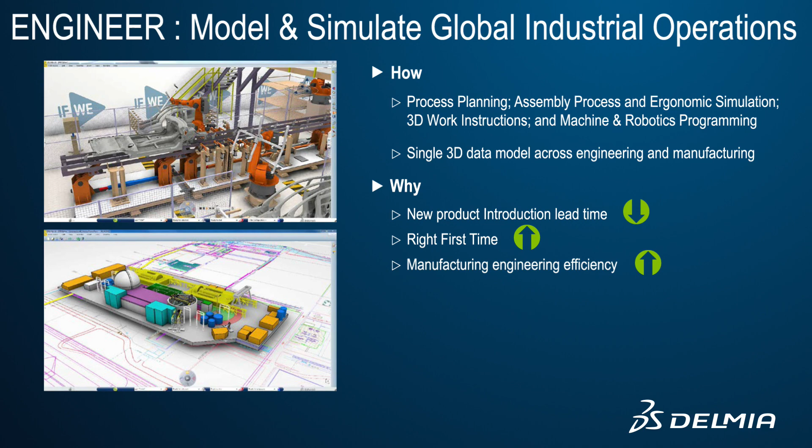This short video provides an overview of digital manufacturing capabilities enabling digital continuity. Digital continuity starts with virtual product design and continues through the production line.

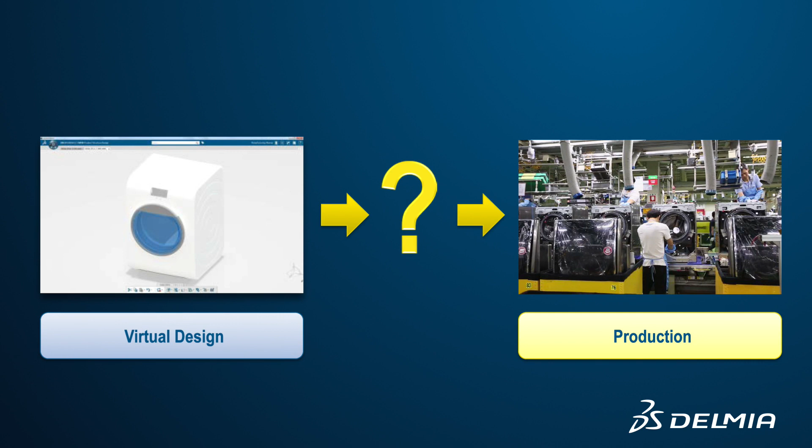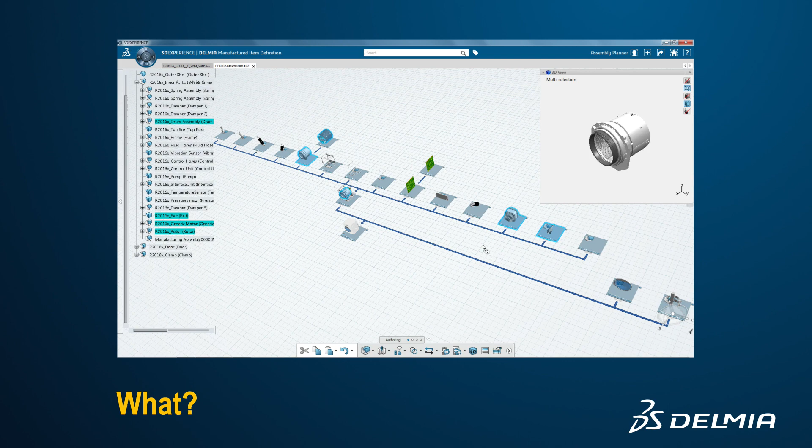Digital manufacturing bridges the gap between design and production by providing the tools to answer the key questions facing a manufacturing engineer. The manufactured item structure describes what to produce and delivers the manufacturing bill of materials. The process plan describes how to produce all product variants with a detailed sequence of operations.

The digital model of the factory and assembly line define where to produce. In this factory layout context, the process plan is validated with 3D analysis and simulation.

By providing a holistic and enriched solution with a model-based, data-driven digital user experience, each domain across the value chain, engineering, and manufacturing is empowered to drive agility and speed.

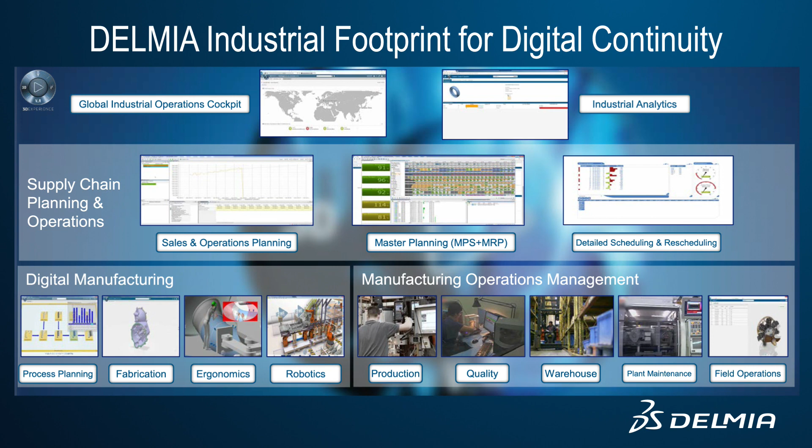Starting with engineering, we extend our world-class product engineering to world-class industrial engineering solutions for all industrial processes. This is called digital manufacturing. Digital manufacturing covers 4 functional domains: process planning, fabrication, ergonomics, and robotics within the digital continuity paradigm.

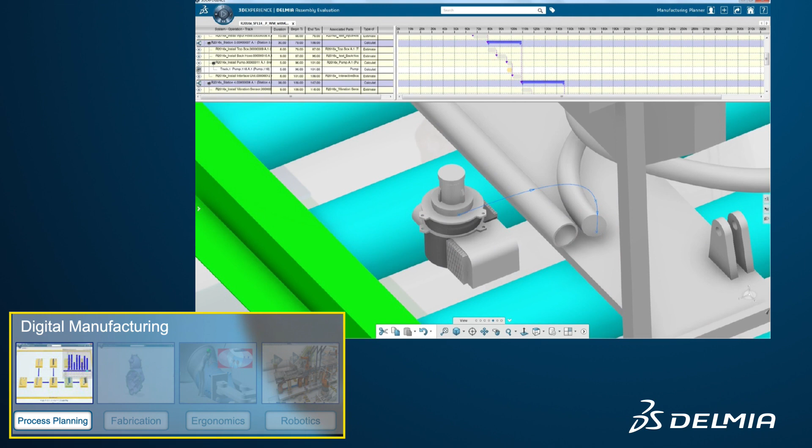Starting with process planning, visual work instructions describe the product buildup with detailed assembly steps. Industry standard analysis methods provide accurate time calculation for manual operations. Line balancing maximizes resource utilization and optimizes the cycle time. Assembly simulation detects potential clashes and ensures manufacturability.

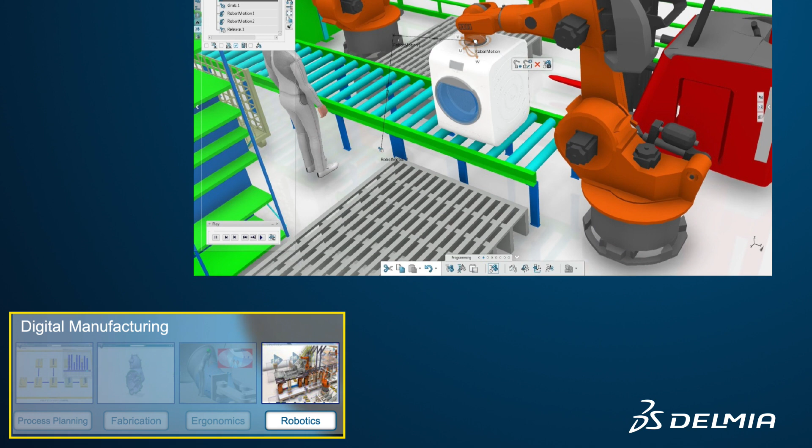In fabrication, NC machine programming and simulation is used to create molds and elementary parts. Additive manufacturing is also used to create parts with industrial-strength 3D printers. Ergonomics analysis secures safe and healthy workplaces. Robot programming and simulation validates automatic operations on the assembly line.

Digital manufacturing delivers the MBOM, routings, work instructions, and machine programs ensuring digital continuity to the production line. All design changes are detected and propagated downstream with digital continuity.

Dassault Systemes' DELMIA brand helps global businesses reimagine their engineering, operations, and planning for manufacturing excellence.

DELMIA Digital Manufacturing is a key component of the overall DELMIA manufacturing solution, delivering digital continuity through a collaborative platform for global industrial operations. By creating connectivity from the physical world of edge computing to big data analytics, with bringing

together the virtual and real-world model, so that you have consistency between what's happening and what's possible to reimagine your business across all time horizons, from long-term planning to real-time execution, to ensure the right decision can be made at the right time, to empower the user experience with comprehensive decision support and confidence to move with agility and speed.